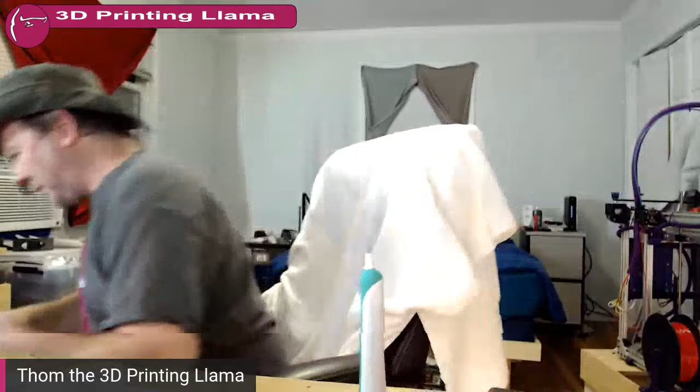So the first thing I got to do is this thing is worn out, so it gets a bath. That's the first thing, the very first thing I'm doing tonight. I need a new bottle of rubbing alcohol, which I have over there, but I have another one right here. So the whole toothbrush gets a dosing and rubbing alcohol, just because it makes it clean. Makes me feel better about it. Gets rid of the yuckies.

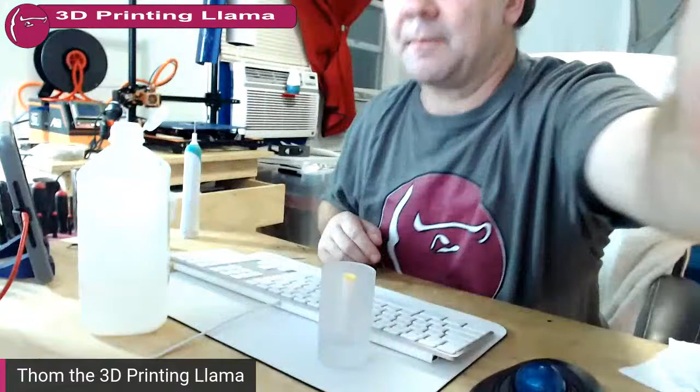Not that it's that bad, this is actually pretty clean for me. And then this is a new toothbrush, and I have discovered that the first thing you want to do with these is put them in a bowl or cup with some rubbing alcohol covering the brush. Let it sit overnight, because who knows whose grubby little hands or factory unit or computer controlled robot covered in some kind of slimy oil built that thing. So I usually soak them in rubbing alcohol for an hour and then fill it full of water. Well, I actually let it dry out.

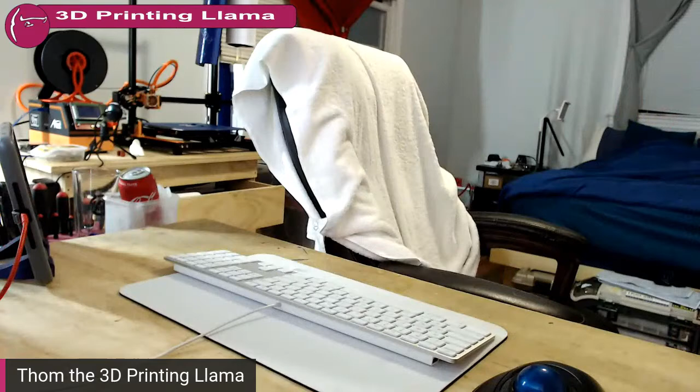Hey, David. Let them sit in water. Charge it. I can't believe I'm sweating, it's not that hot out, and yet I'm sweating. Probably because I've been busy all day, running around like a madman.

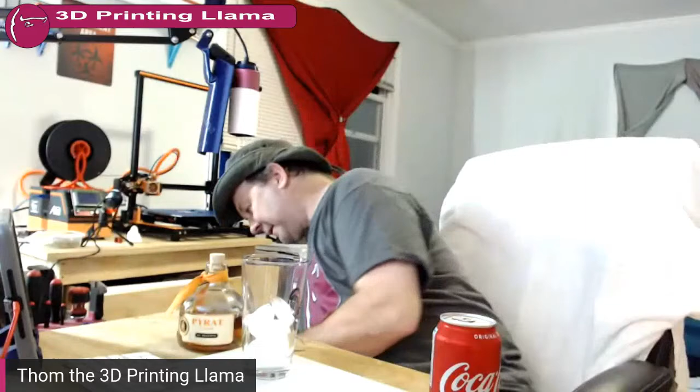Yeah, next thing on the list is relaxation time. Everyone's in bed, I'm happy. It's time. I don't have good rum, but I have okay rum, I have drinkable rum, I have rum. Not really my favorite rum, it's actually one of my least favorite rums, but I have some rum, and that makes me happy, because then I can have a drink. And I'm going to make it weak. A little stronger than that, though, but still very weak, because I just want to relax. I don't want to get stupid.

Actually, I want to take a shot of Coke by itself first. What's up? I was thirsty.

So I've been printing PC Plus, playing with different settings and slicers, and they're all coming out great. Although I sliced this one with Cura, or no, that one was Ideamaker, this one's Cura. And I'm not sure I'm going to get the supports off, because this is PC Plus, and I think it kind of welds together. We're going to find out right now. Wonder if OneRaz - because OneRaz was asking earlier, and then he asked on Facebook - someone can help him with ideaMaker. Yeah, I don't think these are coming apart. I think this part is a complete waste.

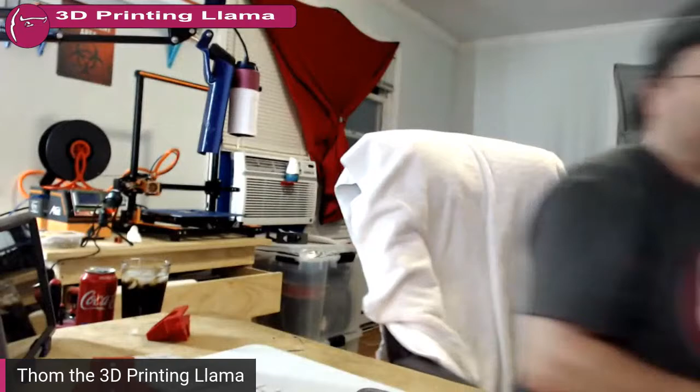I mean, come on, Ideamaker's been doing it for years, Simplify3D's been doing it for even longer. It's very easy, I would imagine, in today's society and technologies, to have true custom supports where you can go in and take a little block and put it wherever you want.

What's up, Jake? I won't even say the dreaded BT - that'll be the code word now, BT. I won't say it, just so you don't get mad.

The dreaded BT, I'm actually printing right now on PEI. Why does this thing keep rolling over when I go that way? That's really weird. Okay, you're annoying me now, I'm going to have to screw the camera down. I guess I need a better tripod. That's almost straight, close enough.

Yeah, that's PEI I'm printing on right there, with glue stick. Supposedly with this PC Plus you can print directly on the PEI if you have good PEI. I guess that's cheap PEI. I don't know, I bought it from Printed Solid, so I can't imagine it's cheap PEI, but I found it holds just fine with glue stick. It almost holds too good. The good thing is I have more PEI, thank you TH3D. So I think that's going to be my devoted PC Plus plate, and that's all I'm going to print on it. And then I'll make another plate and put the other sheet of PEI I just got from TH3D on it. That'll be my PLA plate, because this PC Plus is screwing up the PEI.

It's kind of screwing it up.

I'm sweating, it's not that hot. 78 in here, it's only 68 outside. I got fans going, I got a fan going in the bathroom blowing into here, and it's still freaking 78 degrees in here. I don't get it, this room is... I can go next door, it'll be 60 degrees, in here it'll be 80. This is like a weird room where all the heat goes to, which is nice in the summer, in the winter. Dude, it could be snowing, blizzard out, and I'll have that window over my bed cracked open and it'll still be like 75, 80 degrees in here without the heat on. All the heat just pulls into this room. It's freaking weird.

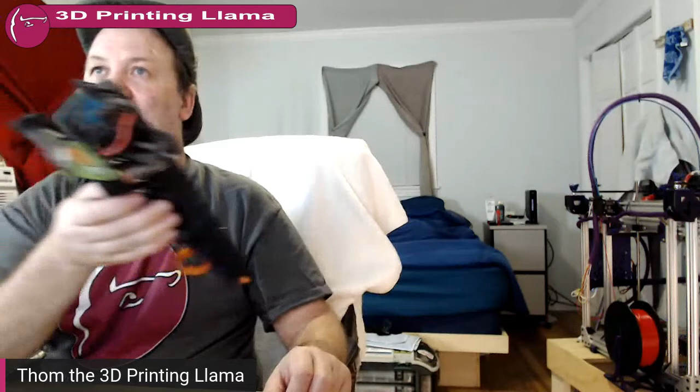This thing is nutty fast, though. It's super cheap, they're like 35 or 40 bucks, and it is ridiculously fast. But it likes to hit trees.

Well, I like to hit trees and break it, and that usually doesn't bode well for the poor little car. The whole nose is missing parts, there's like a whole suspension, it's all broken. I hit a tree dead on, snapped everything. There's another bearing missing, but I have another set for it somewhere. But yeah, there's a concept though. Oh, there's my little plastic freaking axle wrench.

Because I've actually been thinking about converting that to that treaded unit. I bet I can probably show it to you. Do I have it here in the notes still? I think I showed you guys this before.

And I bet if I put this on a gauge, it'll say 2.0, or 0.20. 0.19, close enough. 0.18, so it's actually getting smaller, so it should have held even better. 0.18, yeah, and it broke free of that. I don't know why, and that's been working great. And I cleaned it, and it did it 3 times.

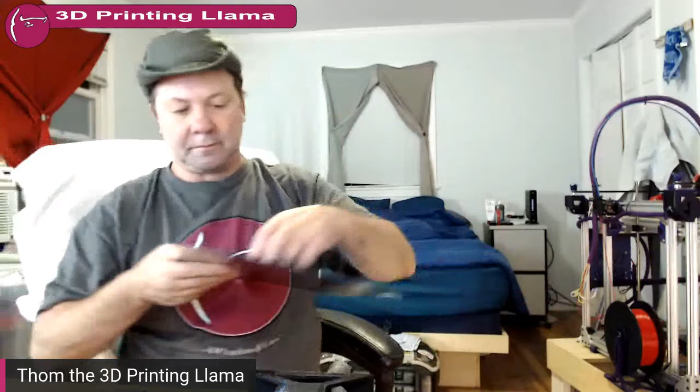And I know you guys love this stuff, and I've actually liked it. This is the first time I've had it really fail. I mean, the body's fine, it's the first layer, held great. But for some reason, only where the supports are, it did it every time at the supports.

I don't know why. It's all like balled up on the edges and peeled up and didn't hold. And I rotated it, thinking it was just a location on the thing that got dirty or contaminated. Even after cleaning it, I rotated it 180 degrees to see if it would do it on the other side. And it was the supports both times. So I don't know what it was.

It may be this filament too. This is a weird Monofilaments Direct, not Monofilaments US, which has been in a maker box a few times out of Vermont. This is Monofilaments Direct, which is out of Massachusetts, not out of Vermont. And it's a weird black PLA.

I've had problems printing it before. It's not terrible, but it just doesn't print as cleanly as others. I wouldn't recommend it. It's $25 for a roll too, and that's shipped and everything. That's direct from them, not going through Amazon or anything.

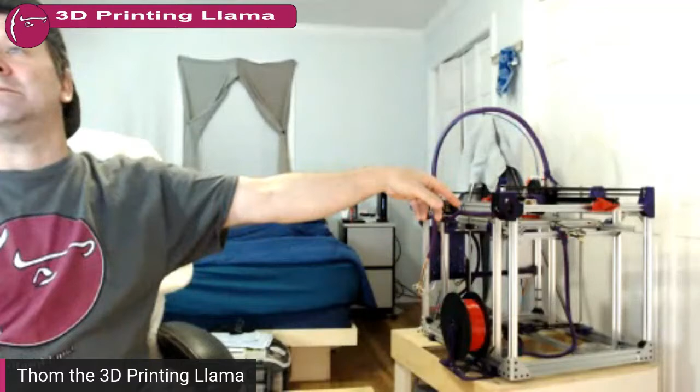And yeah, I'm using 2 parts from that already. You can see this - I get the 2 X carriages. You can barely see the other one over there. Right there, barely see it. But both X carriages are made of this stuff already.

I don't know, you got a camera, dude? At all? Actually, you could just screen share, pop in here. If you got a camera, I can look at your... because if you screen share, I can look at your settings and go, oh, it's this or that or the other thing. So I'm going to send you a link on Facebook, and then you can jump in here. Even if you don't have a camera, you can jump in and I can see your screen. Does that make sense? You can hit the screen share setting.

Am I doing it on Facebook or? Yeah, I'll do it on Facebook. Come on, maybe not. Facebook is very, very slow. Oh, that's because I'm streaming too. OneRazz Printing. Message. I'm going to message OneRazz on Facebook. I should have just done it on Twitter, it'd be done already.

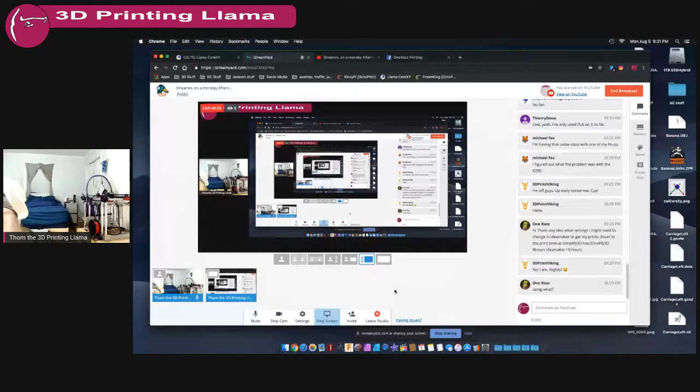The Earth creatures stole my Illudium Q-36 Explosive Space Modulator. He makes me very angry indeed.

Yeah, it'll just be easier than trying to describe it without. I mean, I don't know what your settings are, so I don't know where to even begin looking.

What is up, 3D printing and painting? How's life in the 3D printing and painting? Are you 3D printing and painting? Are you 3D printing? Or are you painting? Are you painting and then 3D printing? Are you printing on your 3D paints? Are you paints? Are you 3D painting? Yep, I'm in a goofy mood tonight, if you can't tell.

I'm in a good mood. Looks like we finally figured out what drugs work with my father, and they're helping him. He'll never be perfect again, but he's so much better than he's been in like 6 months. He can get up and walk on his own. He's a little tipsy, I still stand there and kind of make sure he's not going to fall over, and when he talks to you now, you can understand what he's saying. He still says crazy crap sometimes, like he still wants to go home. This is his home, and he keeps saying he lives in New London. It's like, no, Dad, you haven't lived in New London in like 80 years. But he's definitely better, a whole lot better.

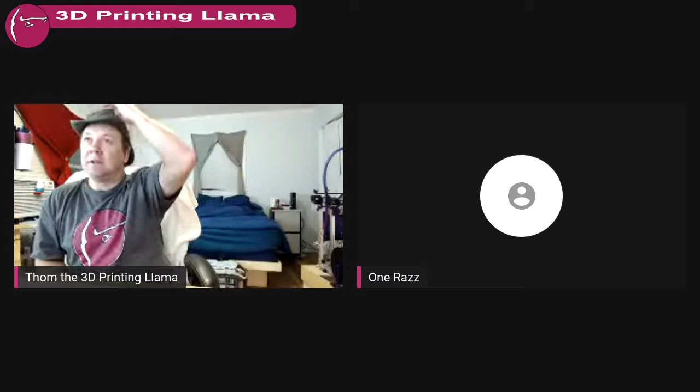Screen sharing is easy to monitor. Screen sharing works best, good computer. We keep losing you, you leaning away from your mic or something? Yeah, I'm just trying to figure out which one of these I need to do. Fire up ideaMaker.

And then if you go like this, can you see my cursor right here? See where it says stop sharing, because I'm sharing right now. But there's a band on the bottom, all you got to do is click share screen. It'll pop up here, and then I can bring it up on top. It'll pop up in my little window here as another user, it'll actually look like a whole other user to me. And then I can bring it up onto the main screen.

Streamlabs, I keep calling it Streamlabs. StreamYard is awesome. Yeah, One Razz screen, add to stream. Okay, do you see? I don't see anything, it's a white screen. Damn, is there text on it? I mean, is that your actual Ideamaker screen? It says Ideamaker new printer, but I'm not getting any text through.

That's weird. Share your whole screen, not just ideaMaker. Go down and say stop sharing screen. Okay, I'll stop that and restart it. Yep, do your whole screen. It says whole screen or application. Show screen sharing is easy with 2 monitors. Screen sharing works best.

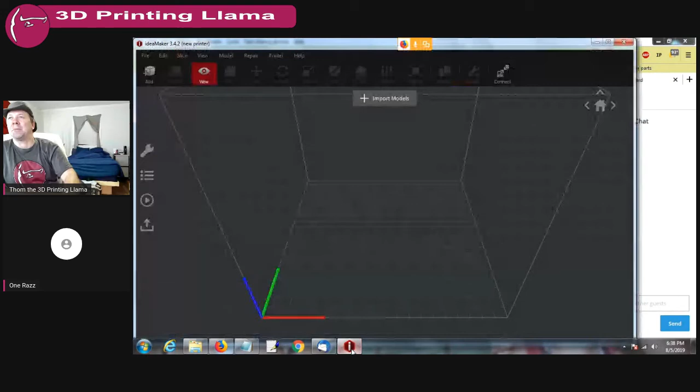Now you should be able to pull up your ideaMaker. Pull up ideaMaker. And there we go. Now we can see it. That's what we wanted.

Okay, now you can just go up to the left and hit - you don't even have to do the slice, you can go into the... well, this is the way I only know how to do it right now. Well, no, stop, because I'll teach you right now. You can go up to... can't get the model out of there. Let me go ahead and kill this.

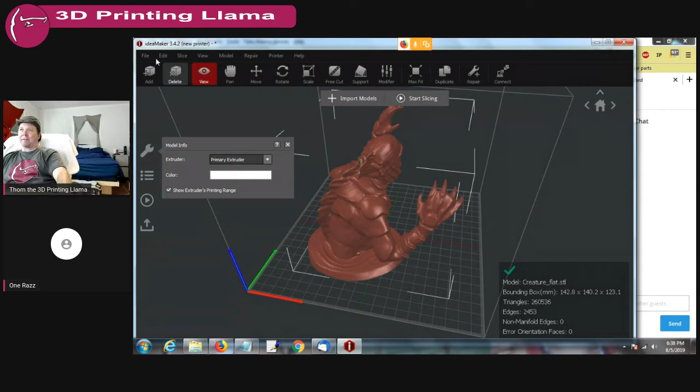Okay, now go up to where it says slice in your menu. Yeah, right there, go down and click on it, and it'll say manage templates. Oh okay cool, and then you can go right into them, modify them, change them. Well, you can see I have 2 here set up. Monoprice Select Mini 3D printer.

Now what you got to learn is, it's hard to describe, but most slicers base settings on the printer. Ideamaker bases on the filament. So when you name those Monoprice, they shouldn't be Monoprice, they should be Monoprice PLA, Monoprice ABS. Get what I'm saying? Because they're based on the filament settings. Everything's based on the filament, not the printer. The only thing it cares about for the printer is size, nozzle shape, temperature ranges. That's all it gives a crap about for the printer. Everything else is based by the filament.

So what are you seeing that's a problem? Hit advanced. What I'm finding, I had this problem before - let's say if I was using Simplify3D and I set up the print, it may say an 8-hour print for it. Well, then I'll set up Ideamaker using the same settings, and it'll come back and say like a 16-hour print. Yeah, and I remembered, Simplify3D undercuts, it's close, but it undercuts. If it's a 10-hour print, it'll tell you it's 8 hours, but it shouldn't be that much more.

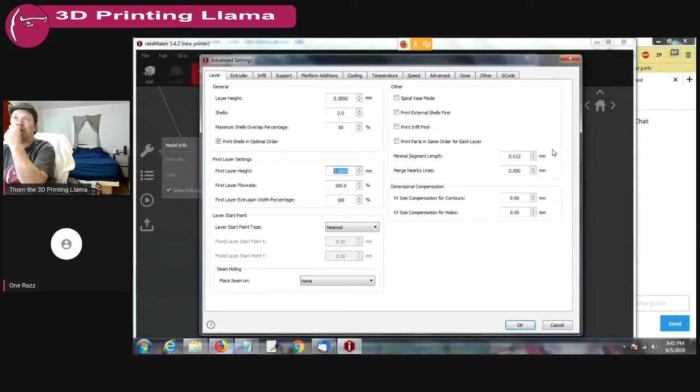Okay, go to extruder. Extruder in the tabs. You've got a 0.40, you're only running at 40 millimeters a second. Is that your print speed normal? Yes? Well, normally I would run at 50.

Okay, oh, that's your retraction. I'm sorry, it's hard to read because it's such a small screen, it's difficult to read, I should know that. That's your retraction, you're only retracting - what printer? Oh, the Monoprice. This is direct drive, huh?

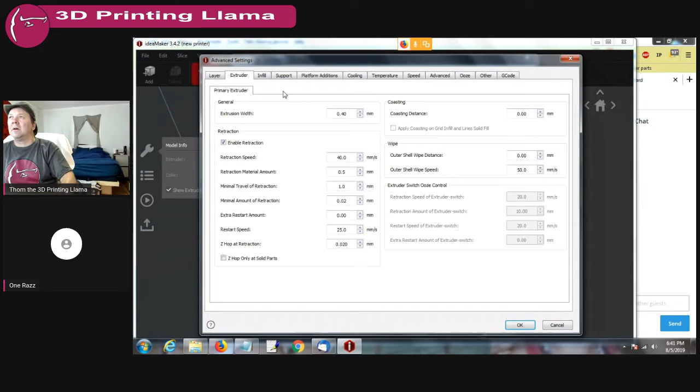What's your infill? 20%, I think I saw. 25. Yeah, go to infill.

25, which isn't terrible. Infill flow rate, grid. You're using 3 and 3, top and bottom. Bottom solid fill, 100%. If you want a stronger print, right at the bottom, this is one thing I love about

ideaMaker. If you want a stronger print, see where it says infill angle and top and bottom solid infill angle? If you make one of those 45 degrees out of each other, like if you leave the infill angle at 45 and negative 45, which could be 45 and 0, actually. The default setting they had was 45 and 135. But I remember Simplify would go 45 minus 45. Yeah, that's exactly the same thing.

Oh okay, you're just overdoing it. Negative 45 and 45 are the same angle. You're 90 degrees out, it's the same thing. I would make it 135. But then your top and bottom angles, I would make 0 and 90. That actually makes it stronger because they're different, so they interlock better. Get what I'm saying?

Remove the 45 and just put 135. No, remove both of those, both of them. Just add one now, it'll be 0. No, leave it 0. Put it back to 0. Put it at 0, you can just type 0. Oh I see, okay, add 0. Then add 90. 90? 90. Oh, I thought you said go ahead and add the 135. 90 degrees. No, 90. 135 is if you're using 45.

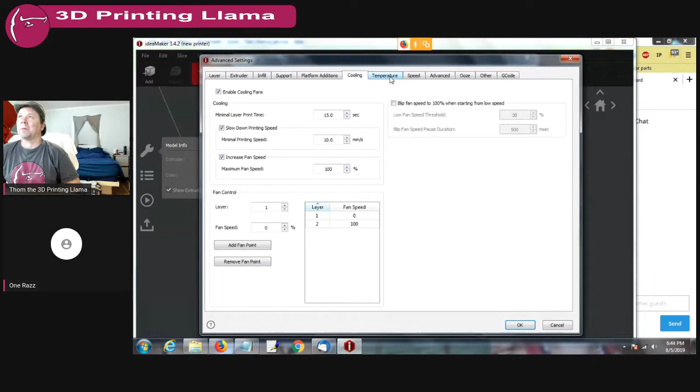Temperatures. 60 and 102, is that what that says? 108? 208. 208, which is fine. What's your speeds? 50, 40, 25. All right.

That's a big killer right there, that 25. I would make that like 35 or even 40 if you're going at 50 millimeters a second. I can almost guarantee you that's what Simplify 3D is doing. On the outer shell? First layer speed at 15 is ridiculously slow.

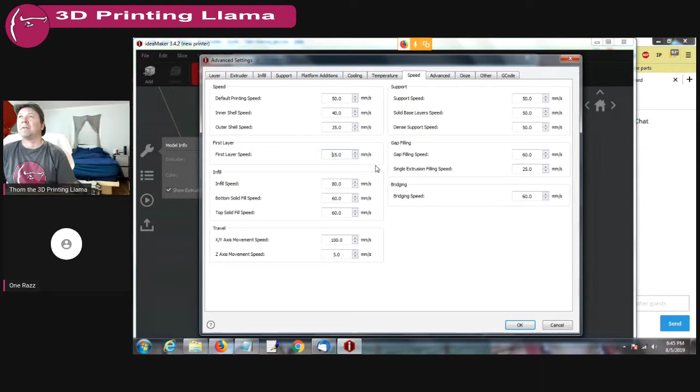You can just type it in there, dude, you don't have to use the arrow keys. Much faster to just type in whatever number you want. Your first layer speed, I would make like 25 or 30. First layers, that one, not 15 - 25 or 30 if you're printing at 50. I mean, you can leave it at 15, but that's killing your time.

25. Infill speed, I wouldn't. What's that, 80 or 90? 80. I would slow that down, actually. I would go like 60 or 70, depending on the printer.

That's a direct drive printer, right? I believe so. Yeah, 60 - the extruder's on the actual head, right? It's not on the side of it. Right, yeah, I would do like 60.

Support speeds at 50, that's fine. I sometimes slow them down. Gap infill speed at 60. Single extrusion filling speed, kick that up to like 35 or 40. Now, you may want to slow these down again if you're getting crappy prints, but that should kick your speed way up.

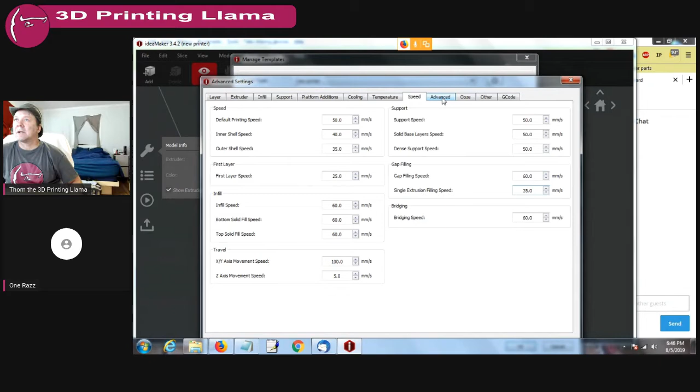Your biggest one is your outer shell was way too slow. And again, it may not be if you want like a perfect print, it'll just take longer. Go ahead to advance, I think you'll find that's your problem. Yeah, there's nothing there.

Ooze tab, that retraction right there. See where it says avoid retraction inside model, and then it says enable retraction at top and bottom. On the bottom, get rid of that, make that 0, and at the top, just make it 1 layer, all the way up to the top.

It says other, talking about stop printing wipe? No, go all the way to the top where it says other. Okay, and then it says force retraction right there. That one's fine, but go to the bottom and make it 0.

And the top, make it 1? Yep, and the top 1. Okay, that'll make it a lot faster. You got the top one at 0 now - the bottom's on top and the top's on the bottom. You want the bottom at 0. See where it says bottom layers? That one should be 0, and the top layer should be 1. You got them backwards right now. Oh, okay.

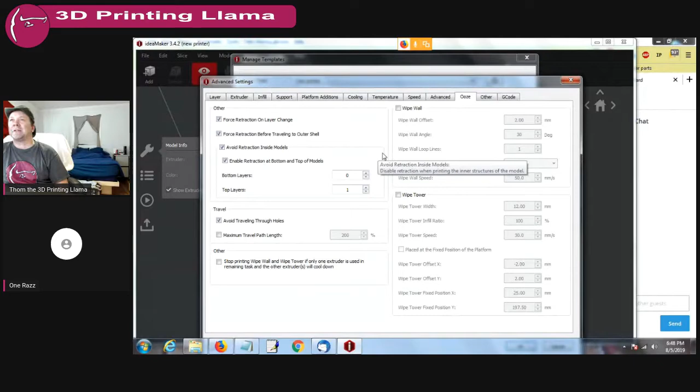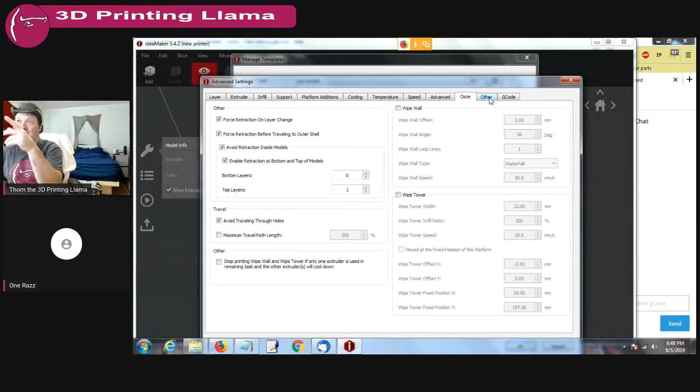You don't need it to. Basically, what that'll do is it goes across and it does the infill, and it gets to each shell. It'll literally go in, retract, in, retract, in, retract, repeatedly, which is good to give you a nice finish on the top layer. That's the only place you need that. You don't need it on the bottom. That's going to save you like a freaking hour right there, I bet. That one setting is probably going to save you an hour.

Okay, and then we got the other.

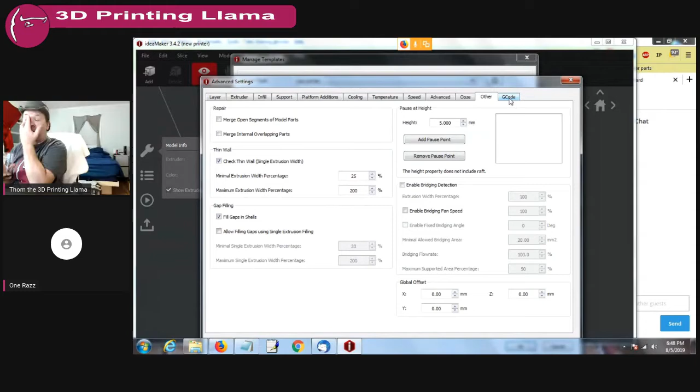There's nothing speed constraint there. And the other way, the G code is just your start and finish G code.

Yeah, I changed my start. Yeah, I do too. The only thing you want to do is down at the bottom where it says post processing. Actually, there's 2 ways you can do it, 2 G codes. What did you go and use for your template? When you first started Ideamaker, you had to select one of their Raise 3D filaments for a template. What one? Oh boy.

All right, cancel out of that. Let me save this off, and I can take a look because I did some experiment. First, I just did a generic. Then I tried a couple different ones. Go ahead, back out of that. Hit OK, so it saves all of that. All right.

Save and close. Now, right up there, you have close. Nope, cancel that. Cancel, I wanted to back this off. It saved it already, it saved it all on its own. Okay, you can rename it if you want. All right, right there it says Raise 3D PLA 1.75 2 templates. All right, so that's the right one.

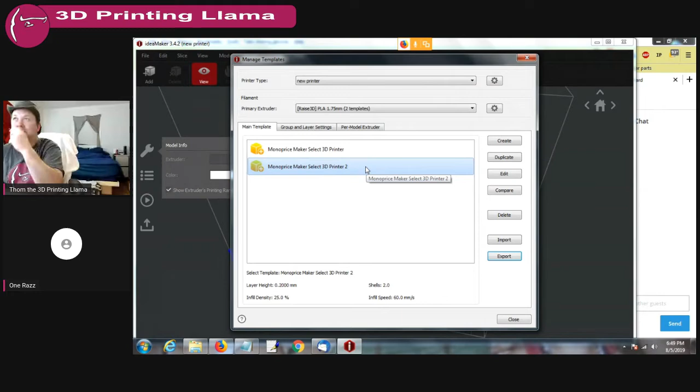Yeah, apparently I didn't really pick any of the other ones. I just did new printer and put everything in. That's all right, close.

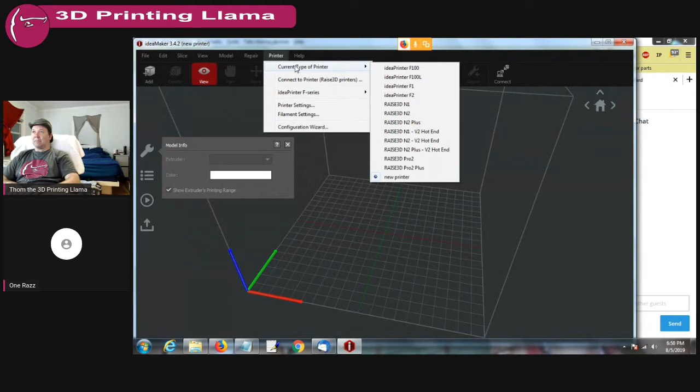Go up to where it says printer in the main menu. Current printer type. All right, so your new printer is selected, yep. And you can make other printers and reset it completely if you want. But...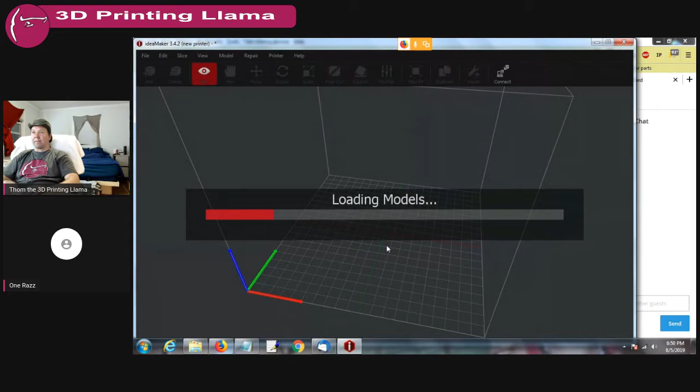That should put the model in there and try slicing it now. And that's what I was curious to see what it comes out with. I still think you'll find it's going to take longer with Ideamaker, but it'll be more accurate to reality.

Simplify 3D always was like 25% off. It always took longer than it said. And that's not an easy model, that's pretty complicated.

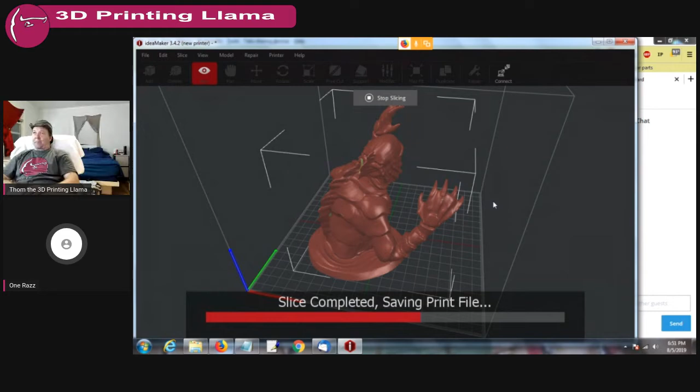Yeah, I know. I had this problem several months ago when I first set it up, and I did something, I can't remember what it was. Let's see, 15 hours. I first set it up, and I did something, and I brought it down within just a few minutes of what Simplify 3D would have. And I said, 'Cool.' Well, I lost all preview of that.

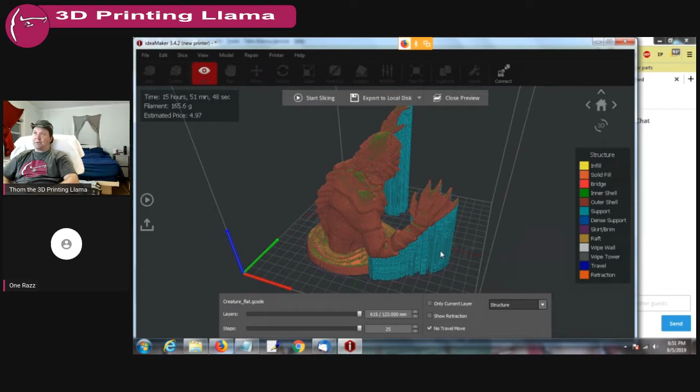Holy crap, that is a lot of supports. Well, it has to support the fingers and underneath the arm. You can manually adjust that, but...

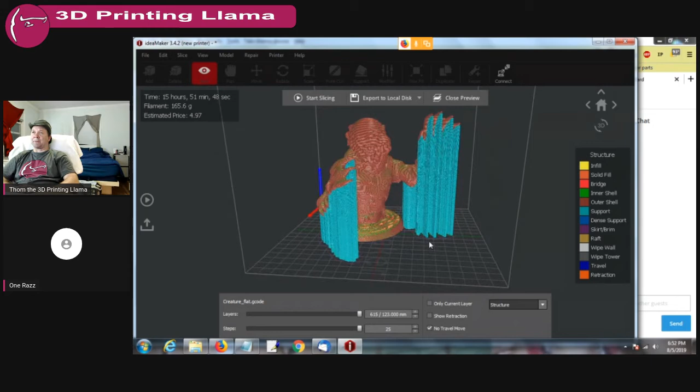And you're saying Cura does it in less time? I don't see how. Simplify 3D does. Oh, fire up Simplify 3D. It's Simplify 3D, not Simplicity, just so you know.

Go ahead and slice it, I want to see what it's doing. Say it's 25%.

It's funny, it actually takes longer to slice. It's putting 8 hours and 19 minutes, which I know is off. It's more like 10 hours, but that's still less than the 15 it's saying. I wonder what the toolpath change is.

You got something definitely running faster because it's not that much faster. Simplify 3D generally is faster printing than Ideamaker. But Ideamaker, actually, I know people have a hard time with it. Ideamaker makes a cleaner print, I think.

And I usually don't screw with it, I leave it pretty much stock after I set the basics. Yeah, I don't know why it should take that much longer, though. Go back to your settings. No, in Simplify 3D, I want to see what's different.

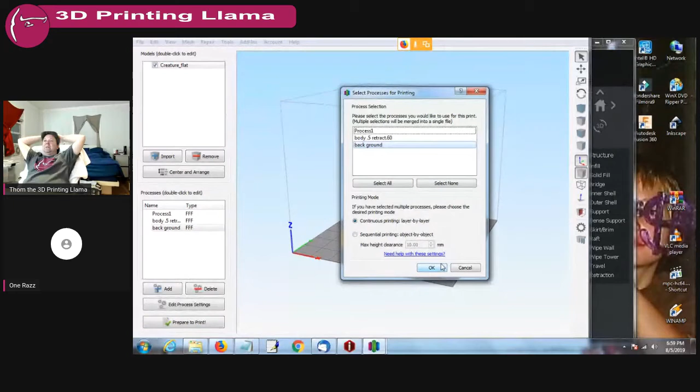What's we doing in the background? I've been wanting to print some of the classic creatures like Frankenstein and things like that.

What's it at now? It's 16 hours and 45 minutes. There you go.

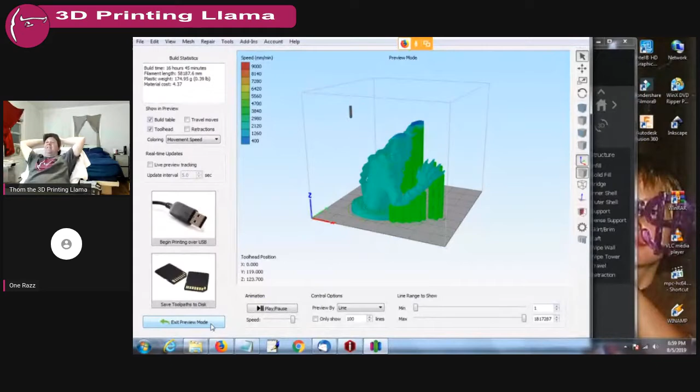Is there any way of cutting the quality for print time on Ideamaker? Not that I know of. You can kind of use it, I haven't played with it. It's got one of those smart technologies where it'll do a higher resolution at easy spots and a lower resolution at hard spots - actually a higher resolution, lower layer height.

Because if you go into the advanced settings, go back to Ideamaker, close that out. Make sure you save it if you've done any settings. Save and close. Advanced - want to close it out completely? Save and close. Now it says group layers and settings and all that. Go back to that and start slicing.

Manage templates, that's the same thing. Go ahead, right there - it says group layers settings per model. That's all your fancy multi-layer processing, like Simplify 3D.

It's actually way higher technology, but it's also way more confusing to use. Once you get used to it, you can do stuff with it. If you go to per layer settings, go over to the right.

I'm still trying to clear out what you're saying through the echo. Go to the right, per layer group settings - no, per layer. Stay right there, per layer settings, right where you are. Now hit add, the little plus sign on the bottom.

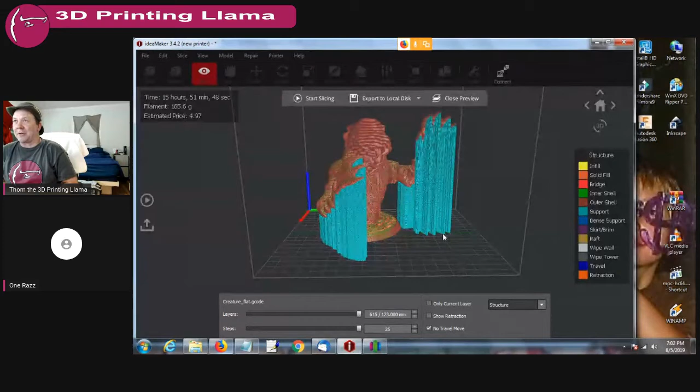I shouldn't say way more powerful, because I still found a couple of things that Simplify 3D does that it won't. It's a little weird.

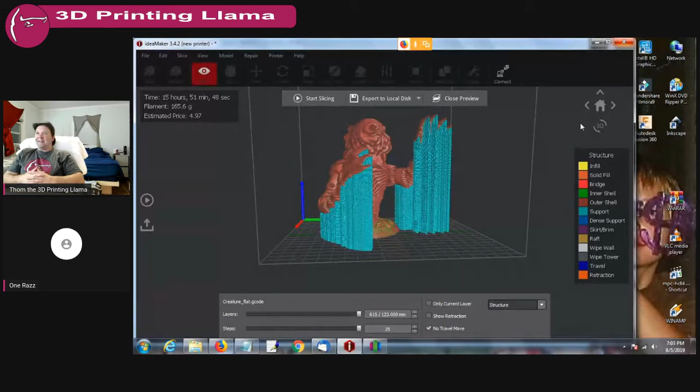Well, there you go. I'm trying to think - I'll have to look, I don't think Simplify or Ideamaker does a low res. It just doesn't do it because it's Raise 3D, they don't do low resolution. You know what I mean - the resolution was going to pixelate it, was going to poly it.

You'll actually see the little triangles at medium resolution, which you may not see on that model because there's such a high - I imagine that thing has a wicked high poly count anyways. So you really probably wouldn't notice it. Honestly, I would print one of each and see if you do notice it.

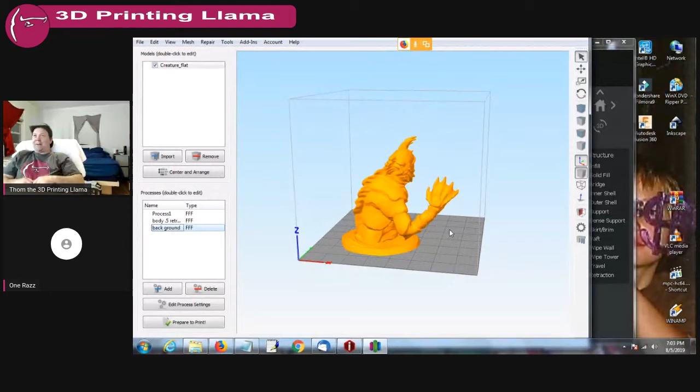Yeah, 16 hours with the setup I have right now is a long time. I don't like doing anything over like 5 hours here where it's in my bedroom, drives me nuts. I'm already running late - I really was hoping I wouldn't start that tonight. They probably have another hour on that, and I want to go to bed before an hour's over.

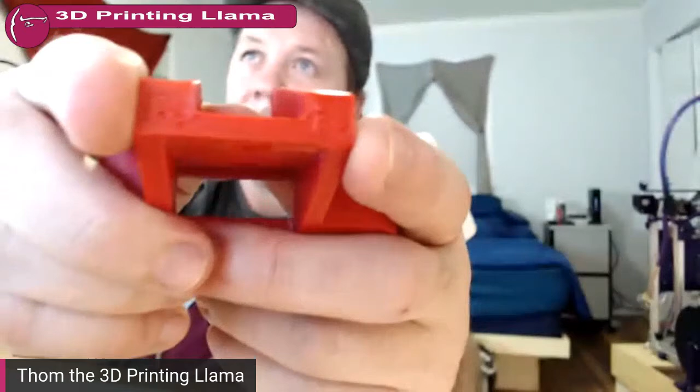Like if you look at this, see that hole right there, on this side? Get the focus on that. Yeah, the hole's right there. Simplify 3D will be 100 times worse on those.

When it does infill, I can't show you on this model because it doesn't show it, but there's always a corner on Simplify 3D that doesn't fill. There's ways around it, and you can screw with it, but the problem is it fills that hole, but it also bloats the whole print.

So if you do anything to spec, like I print the spec, everyone does clearances with Ideamaker. I don't add clearance, I do it right on, and it always works, because it knows that my 0.4 nozzle, the outer edge of that 0.4 nozzle - if you've ever noticed, most slicers don't do 0.4 for an actual line width. If you have a 0.4 nozzle, it actually prints it like 0.42 or 0.44 or 0.48 or whatever the printer's set at.

It knows that width and makes the outer line exactly that. Where Simplify 3D does it from the center of the nozzle. So any of that nozzle, that 0.2 plus swell, is overblow. So it's out of spec. That makes sense? Anyone understand that?

Here, I'm going to give you a demonstration, this will be fun. I can actually show you in this program. People don't realize this - this is one of the things I really, really, really hate about Simplify 3D.

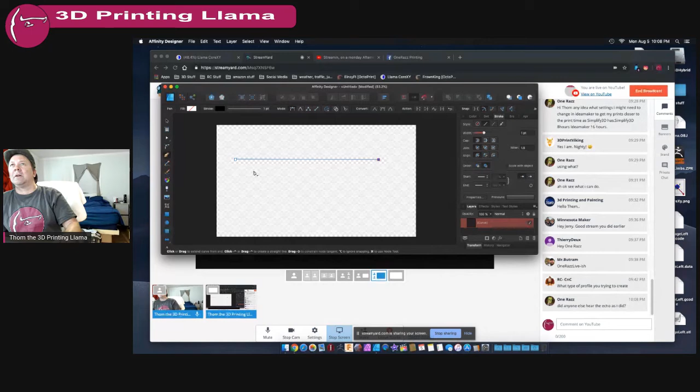Okay, you're seeing this screen, right? Yes, I know you are. Okay, file, new, whatever size you want, doesn't matter. So if I draw a line from here to here, like a printer, okay, then your stroke is 0.4, so I'll make it say 4 so it looks like 0.4. Actually, I want to make it like 40, how's that, so it's exaggerated. 40 - okay, let's say that's your 0.4 layer width.

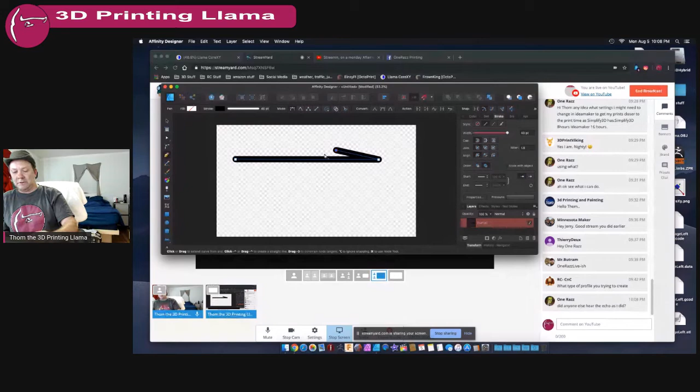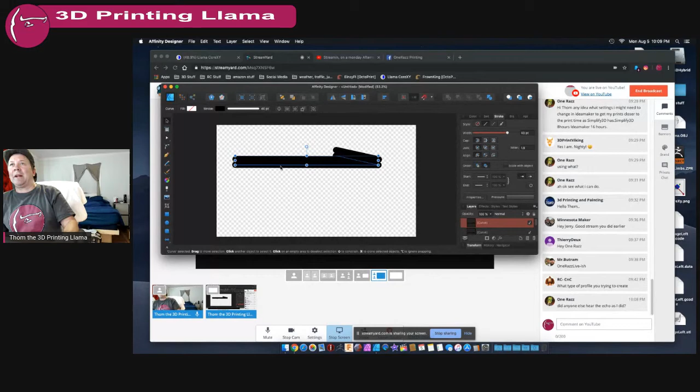Simplify 3D bases its structure on the center line. So when it's doing a print, it does it overbleed. So when it does the next one, it's basing it on this center line, and then the next one, it's basing it on the center line. The thing is, from this center line to this outside edge, it doesn't estimate.

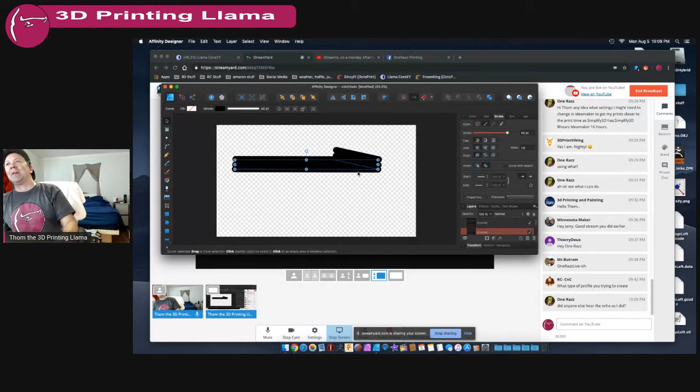It doesn't see it. Where Ideamaker, when it sees the model and slices it from this very outside edge, and it says, okay, you have a 0.4 nozzle, and you're telling me I'm printing at 0.42 - that's your swell, your overflow, which all nozzles have a little overflow. They actually print wider than the actual orifice. That's how it works. When you squish it down on the layer below it, it swells out on either side. And if you set it at 0.42 or 0.44 or 0.46, which are about average, it knows that and says, okay, shift the line in.

Simplify 3D doesn't - it leaves it right on that center line. So if you have more swell than it estimates, it doesn't care. It won't compensate for it.

No, I didn't hear any echo, dude, it must have been just in your ears. You know what it probably was? You probably had the YouTube going at the same time as the StreamYard's going, and you were hearing both conversations. So the YouTube conversation was like, 10 seconds, 30 seconds later, so you're getting that weird echo. You turn the YouTube video audio off, and then just hear the StreamYard's audio, not video, just audio, because you didn't have video. But anyways, do you guys get that? That makes sense.

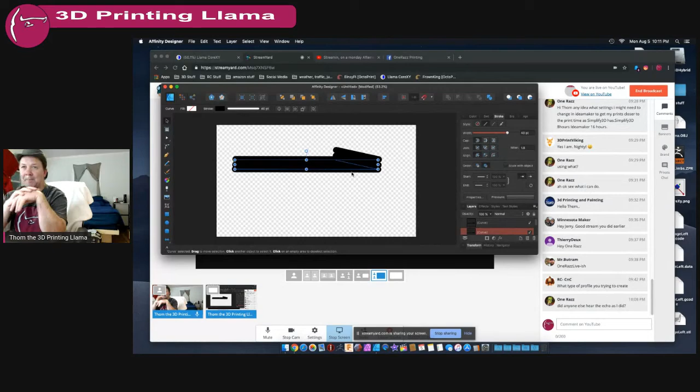That's the other thing I didn't like about S3D. Plus, when it does a print, like if there's a circle, let's print a circle, okay, and then it goes to infill it. Simplify 3D goes like this.

Okay, I'm pretty bad at this, but alright, and it will fill all these in. Actually, let's go to individual markers - it'll fill all these in proper, but it'll always leave this little slice right here off. It'll do all this proper like, but it will always leave a little opening right here at the top and the bottom.

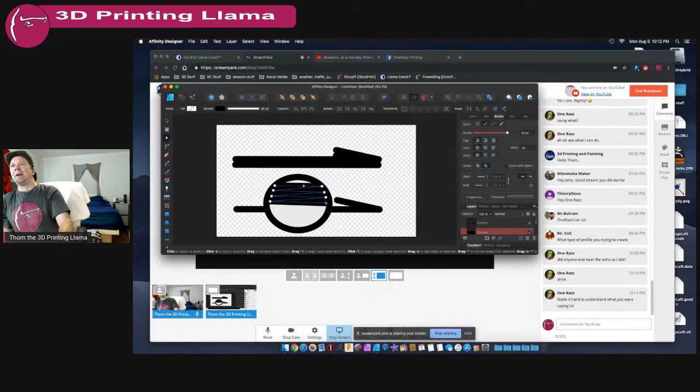S3D always does that. You can compensate by overswelling, overlapping, whatever.

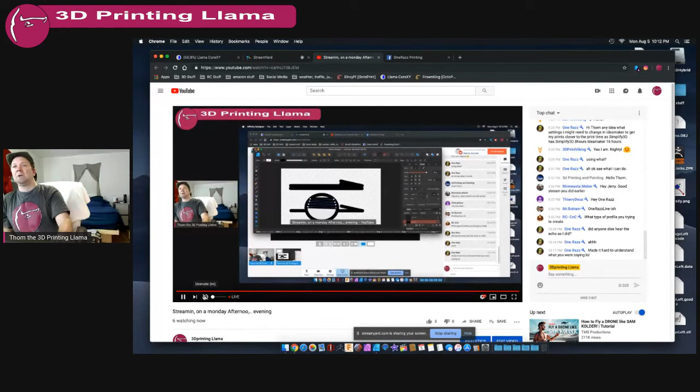But yeah, that's probably what you were doing, dude, you were listening to both audios at the same time. You have to go into the right here and have to have the X through the audio, mute, when you're in the actual YouTube video, or just close it out altogether.

Look, little llama head, going round and round and round. Come on, get your finger close. There you go, there it is. Little llama head, going round and round and round.

I think the little llama heads are awesome. I gotta make little hats for them. They can have little freaking Outback hats. That's gonna be the next thing, give them little Outback hats. I should do that to my logo, have a little Outback hat on here.

Not happening now. Anyway, what time is it? Almost 10:15. Probably gonna kill it.

I'm trying to think if there's a low res print on Ideamaker. I actually think there is, now that I think about it. Yeah, I don't think there is. I don't think there is. I think you have to stay with high res on every one of them.